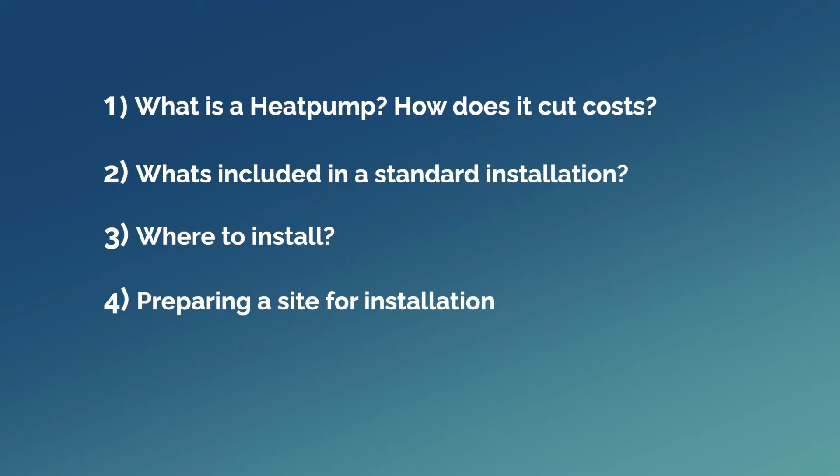By the end of this video, you'll know these 5 things. Firstly, what a heat pump is and how it can save you money. We will go through what is included in our standard heat pump installation. Next, I will discuss how to decide where to install your heat pump and what you need to be aware of so you can avoid disappointment. We'll then cover prepping your site for installation, and finally, I'll discuss the timing around the installation of your heat pump and your spa delivery.

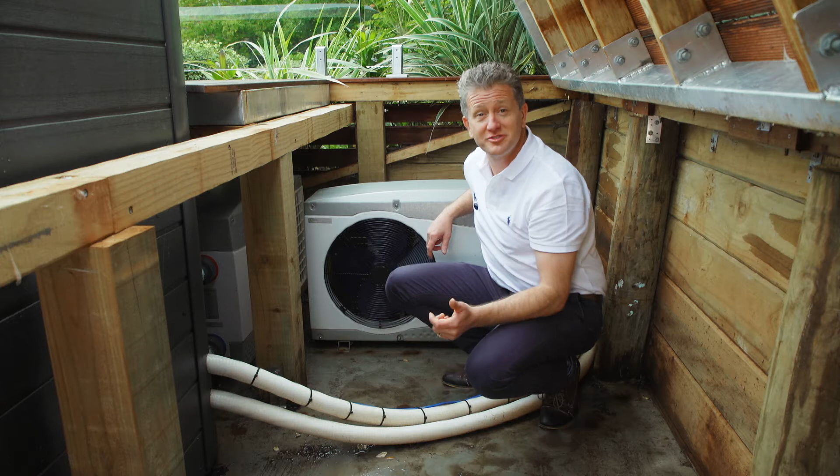Just like heat pumps found in most homes, the SpaNet heat pump uses refrigeration technology to extract heat from the air, even when it's cold. SpaNet heat pumps can save up to 75% on your heating bill compared to electric heaters, and up to 55% compared to natural gas. But that's not all. SpaNet heat pumps can also reverse cycle and cool the water in your spa, which is ideal for people who live in warmer climates.

Depending on which SpaNet heat pump model you choose, your heat pump will have an approximate dimension of 960 millimeters long, 320 millimeters wide, and 650 millimeters high, and weigh over 45 kilograms. Please check your manual for exact dimensions.

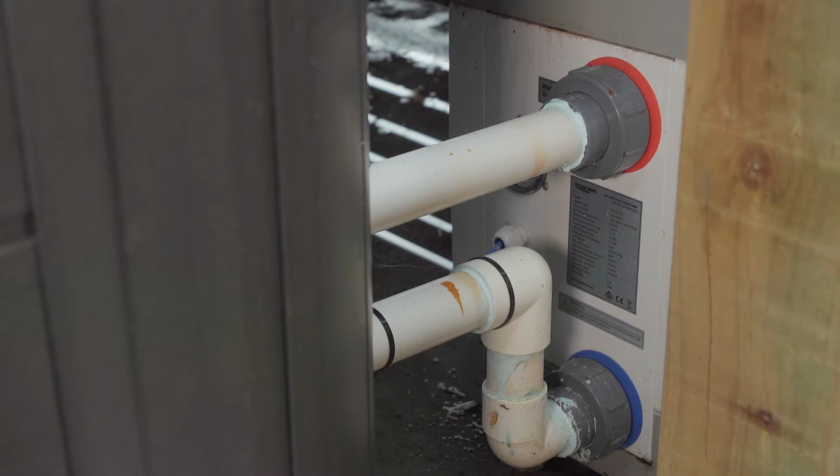A standard installation is within 50 kilometers of one of our stores. During a standard installation, we will complete the plumbing connection to your heat pump and spa or swim spa. This is not the case with an out-of-area installation, where you will have to organize the entire installation, including the connection. We will not install electrical circuits or plumbing runs. You will need to use your own electrician and plumber for this, and you are responsible for any associated costs.

It's important to note that the removal of deck boards or digging or work within a trench is not included within our standard installation. Please see the pre-delivery guide for details around trenching for your heat pump installation. If you require anything other than a standard installation, you'll need to contact us so that we can assess your requirements. Please note that no electrical work is included in a standard installation other than connecting the heat pump power and data cable to your spa controller.

There are far too many installation scenarios to cover in this short video. However, there are 5 key points that you need to take away that will help save you added cost and time. The heat pump will need to be installed no more than 3 meters from the spa controller because it comes with a 5-meter power and data cable. Both of these cables need to be connected to the spa controller at installation.

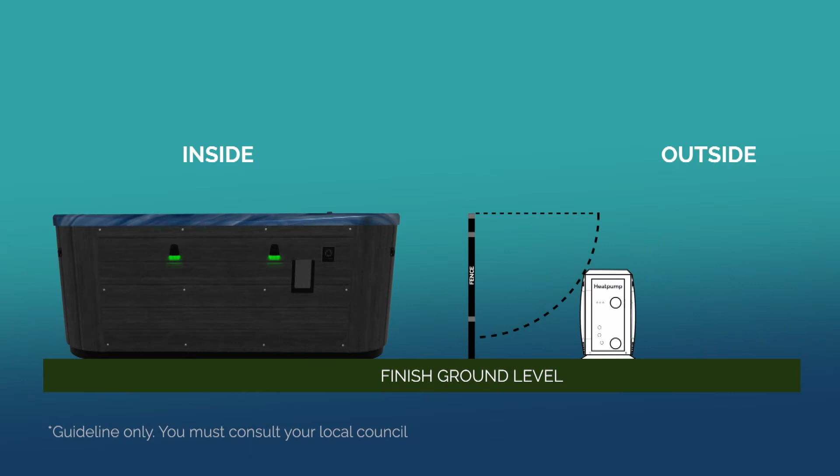If your heat pump is to be installed outside your fenced pool area, a minimum 900 millimeter non-climbable zone from the top of the spa to the closest point of the heat pump must be maintained, while also maintaining a minimum 500 millimeter distance at ground level.

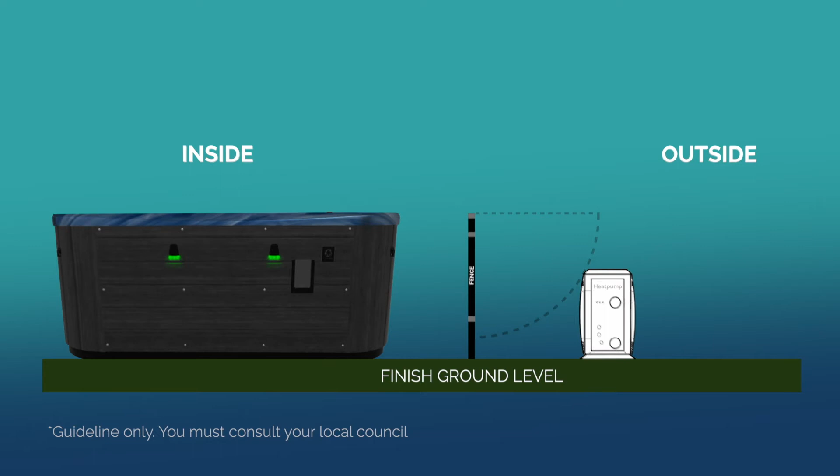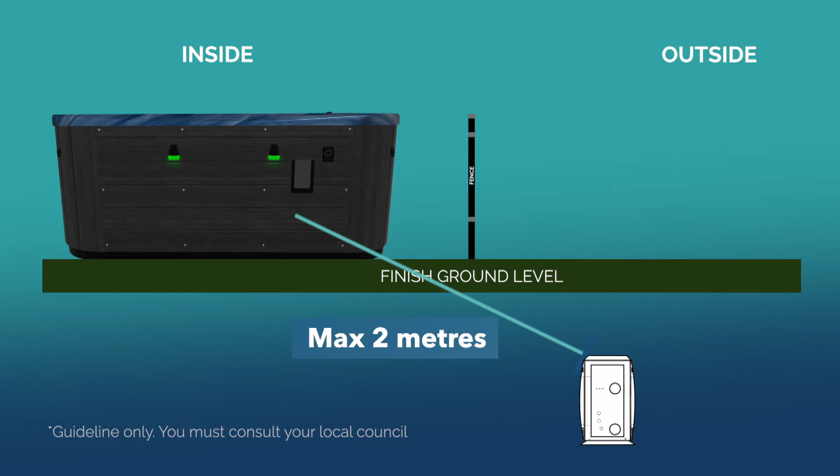Your heat pump cannot be installed more than 1 meter higher or lower than the base of the spa. If installed above or below the base of the spa, you cannot install the unit more than 2 meters away from the spa's controller. The sidewall of a swim spa can act as a barrier, and the same distances apply to a swim spa as it does to a portable spa.

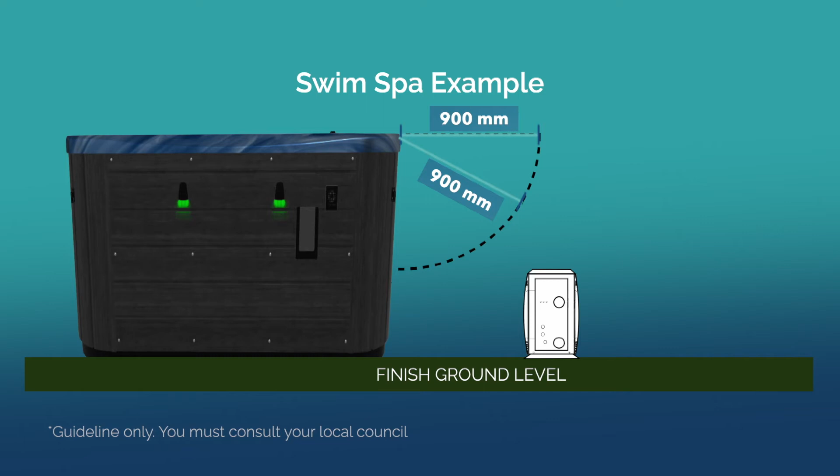The heat pump must sit on either a concrete base or well-laid concrete paving stones. The most common solution is to pour a pad extension for the heat pump when the main spa pad is being poured. The heat pump moves a lot of air, so both the back and front must be completely unobstructed. The manufacturer recommends 300 millimeters at the back, 700 millimeters each side, and 2.5 meters to the front of the unit. If you are planning to install the heat pump below decking, in a pit, etc., you must ensure the clearances detailed above are maintained for maximum efficiency.

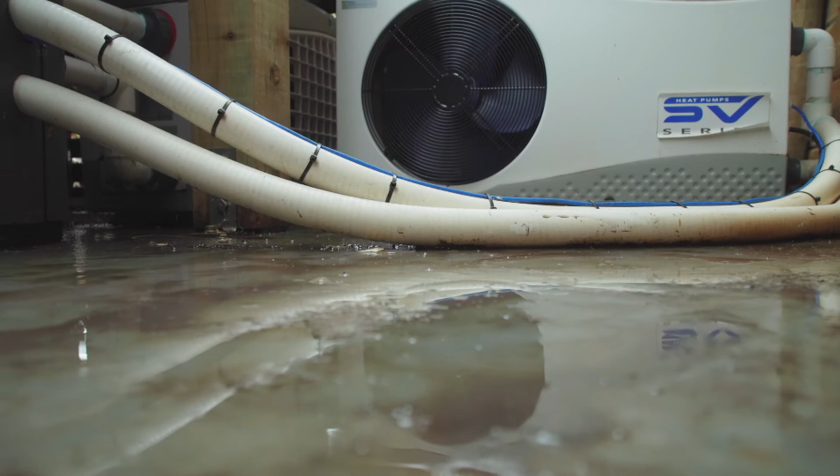Before our team can install your heat pump, we must first make sure that your site is fully prepped and ready. You'll need to provide a level, stable surface for installation clear of any obstacles. Another point to be aware of is that a heat pump has a condensate drain, and so the area will get wet.

In Australia, excluding Western Australia, your spa must be filled and powered up before your heat pump can be installed. Within 2 weeks of your spa delivery, the heat pump technician will contact you to schedule your installation. If your spa happens to not be ready, your technician will reschedule the heat pump installation for a later date. But don't worry, you can use the onboard heater in your spa to heat it until your heat pump is installed. If you're in Western Australia, your heat pump is installed at the same time as delivery.

In New Zealand, your heat pump will be installed at the same time that your spa is delivered. But no matter where you're located, you always want to talk to your Spa World concierge and get the exact heat pump installation details. You and your family can now take full advantage of your new spa or swim spa, knowing full well that you're saving up to 75% of the running costs.

Thank you for taking your time to watch this video and for doing your part to make sure that your heat pump installation goes smoothly.